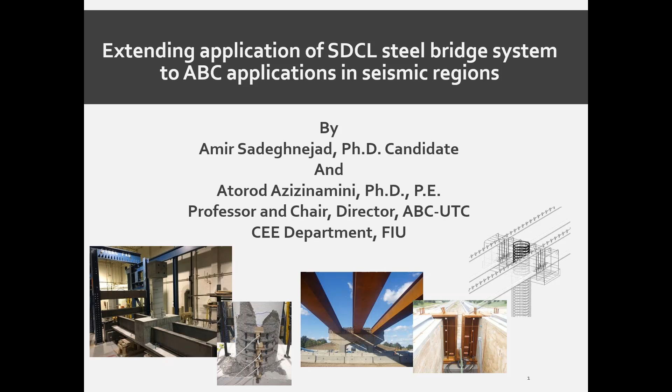For those of you who have not been introduced to the simple for dead load and continuous for live load steel bridge system: typically, the steel bridge system is continuous for dead load and live load. You have a middle piece placed over the pier, and then another end unit that is bolted to the middle piece and supported by a separate crane over the pier. So there are bolted splices, and you usually need two cranes for construction, or temporary towers and things like that.

In this system, you just place the steel girders between the supports, then place some reinforcement over the middle pier, and then cast the deck. When the wet concrete is applied to the system, each girder acts like a simple span - that's where the name simple for dead load comes from. But when the concrete is hardened, the system becomes continuous for live load. So therefore, the name simple for dead load and continuous for live loads.

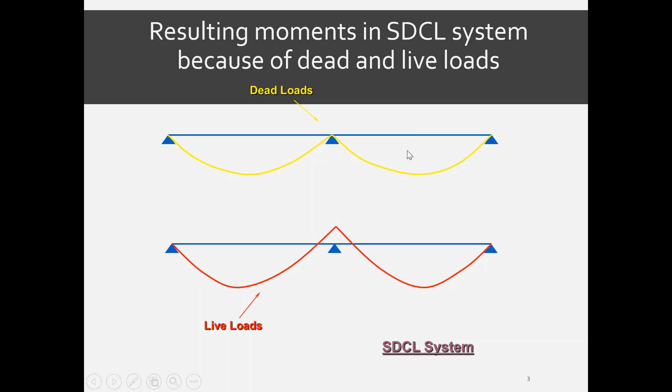Also, when you have a bolted connection, those are an attraction to corrosion problem because you put the girders over the support. You don't need to have two cranes on site, you just need one crane.

It's very stable because I'm going to show you the way to achieve the continuity is by connecting the steel girders over the middle support. During construction, anytime you have the end of your steel girders secured against rotation, you have a very stable system. Nothing bad is going to happen during construction. Those of you who have experience know that if anything bad wants to happen, especially with steel bridges, it happens during construction, usually related to the end support condition. So in that sense, this is a very stable system.

Also, service life. We have many problems with steel girder bridges at the supports because of water and moisture getting in from the top, from the joints, from the expansion joints and so on, causing corrosion at the end of the steel girders. In this case, the end of the steel girders are secured against moisture by being cast inside the concrete, and that helps a lot. So this detail also helps the service life.

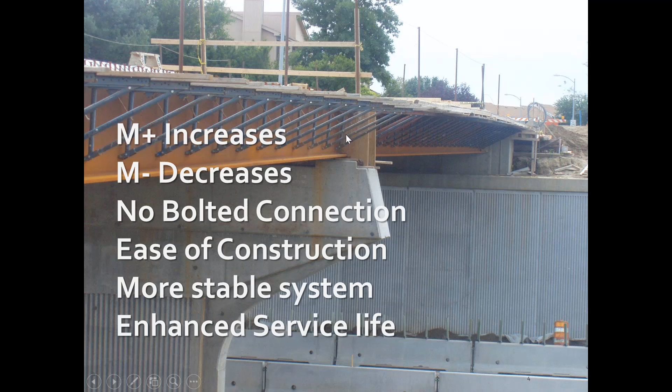There are other details to achieve this SDCL continuity. We do not recommend that. We feel like attaching them using concrete is a better way to go. So over the pier, really what you need...

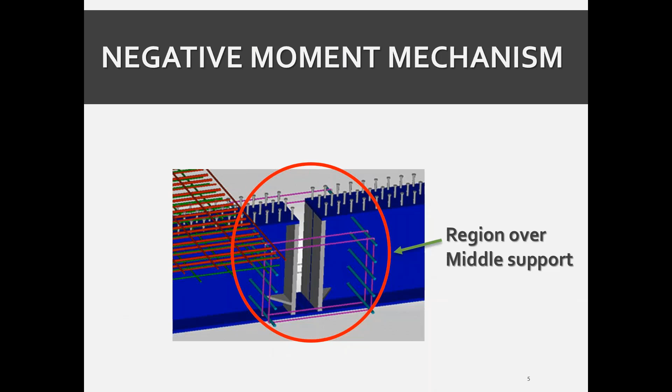...deck. This gives you basically the mechanism to take the tensile force over the pier for negative moment. You also need a mechanism to transfer the compression force. If you use the concrete diaphragm to join the girder, the most important design detailing is to make sure that you have a continuous path to transfer the compression force from one flange to another flange without relying on the concrete. That's very important. Now, you can achieve this using different methods.

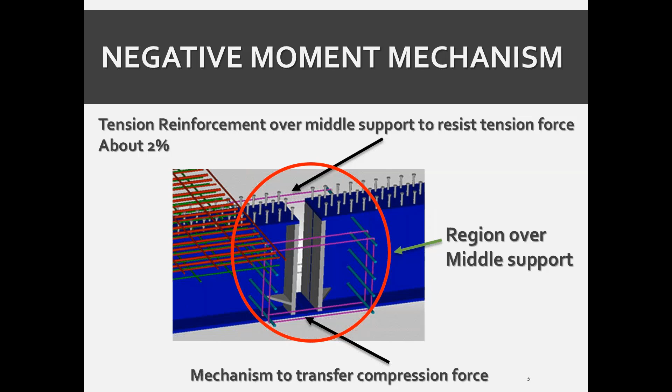I will show you one detail that we have used in practice. The detail I'm going to show you has been researched for more than 7 years. This system, we have researched anywhere from development to monitoring and so on. I will give you some references that you can refer to if you need more detailed information.

Now, one detail that we have used on many projects - by the way, there are many of these bridges in service right now and they have exhibited very nice behavior. One detail is the end of each girder over here, over the pier. There's an end plate, and then there's a steel block. The steel block that we have used is as wide as the width of the flange of the girder. It's about 2 inches thick, and the height is about 4 inches.

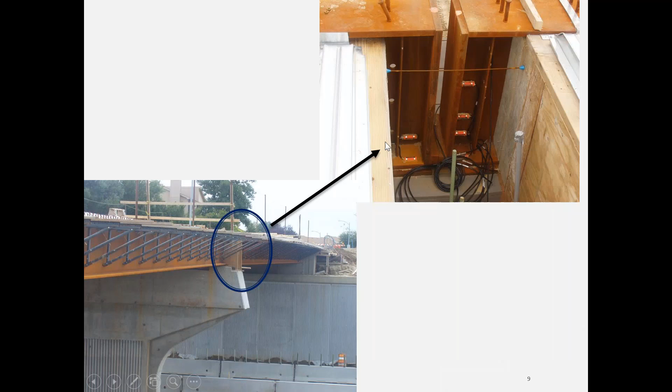So here is the detail, I hope that you can see that. Basically, over the pier, you see the portion of the girder that is embedded in the concrete diaphragm. Each end has a steel plate, end plate, and then the steel block. These steel blocks don't have to be full penetration weld or anything, just tack welded, because you're only transferring the compression.

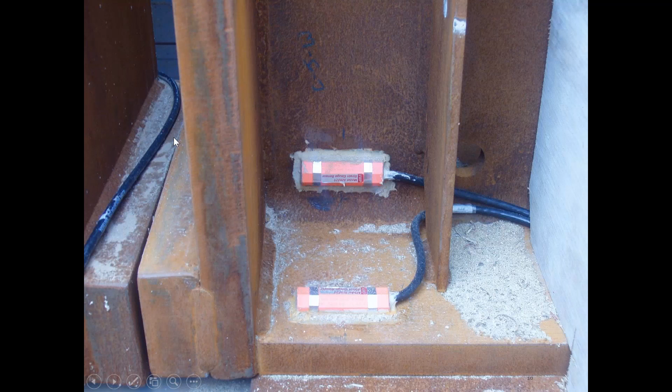This is another shot on a job. Again, in this case you have some contact, but even if you have, let's say, a half inch or so gap between the steel block, you would be just fine. This is another shot of the same bridge - you can see that steel block over here, end plate, and the steel girder. This is the concrete diaphragm.

The sequence of the casting is that you fill this concrete diaphragm maybe halfway, and then you wait for a couple of days until that concrete is hardened. After the concrete is hardened, then you go ahead and cast the deck and the remaining of the concrete diaphragm.

Another thing that's important: we have a detail that allows this whole concrete diaphragm over the pier to rotate. It is hinged using these dowel bars. It behaves like a hinge, so it cannot translate horizontally in either direction, but it can rotate, and you can put some soft material underneath that concrete diaphragm, between the cap beam and the concrete diaphragm.

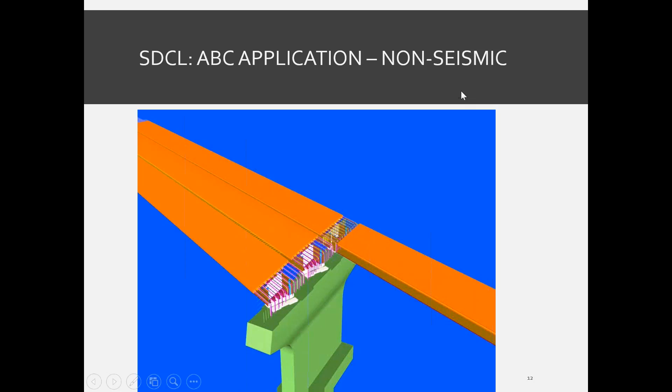Now the ABC application, again, this is non-seismic. In the ABC application, what you have is either a steel box or steel beam. You cast the concrete on top of the box or the steel beam, then you bring this unit, put them side by side, and the longitudinal reinforcement needed for live load continuity, you can develop those by hooking them in the concrete diaphragm.

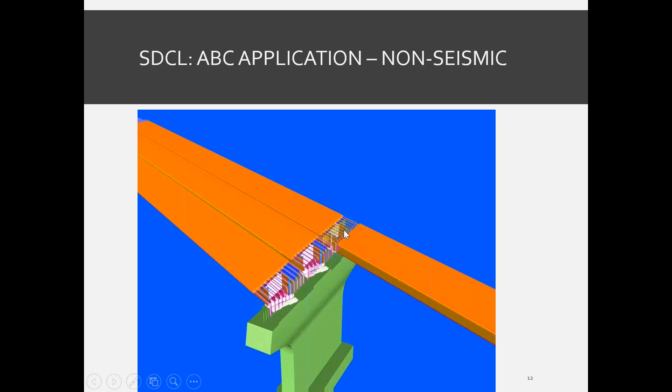One more thing: in a typical bridge, we need about 1% longitudinal reinforcement over the pier for steel bridges. For live load continuity, the amount of longitudinal reinforcement increases to about 2%. The design of that is very simple, it's just like a reinforced concrete beam, and we have a document that tells you how to size the rebars for continuity. But in a sense, it's about 2% of the concrete area.

So in the SDCL as applied in non-seismic areas with the ABC application, it is very user-friendly. First of all, this is an SDCL system that uses the steel box. You form it up basically on the ground.

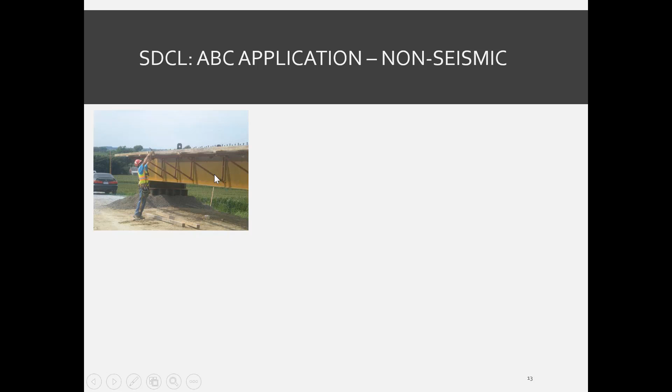Now, in this particular job, the contractor, in fact I was on the job site when they brought the girders. The contractor just put some gravels, put some steel beam, and then the girders were placed over this support that was built in just a matter of less than an hour. And then after that, you form it up, and then you cast each unit.

Basically, you can have a partial depth deck, or you can have a full depth. These are modular units. You can also cast a railing system if you wish. This particular project was 139 feet each span, and the unit, the steel box with the concrete on top, even if you go with the full depth deck, it's going to weigh less than 100 tons, which is very appealing.

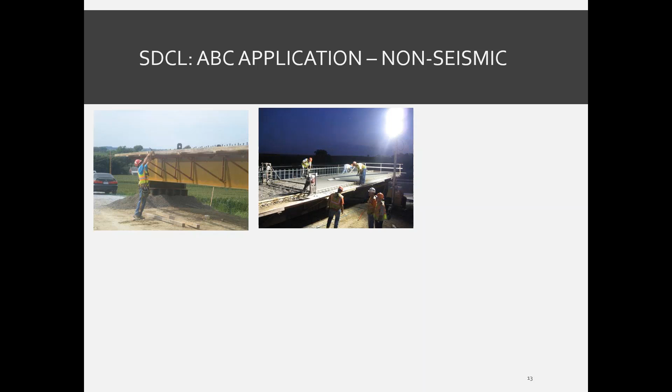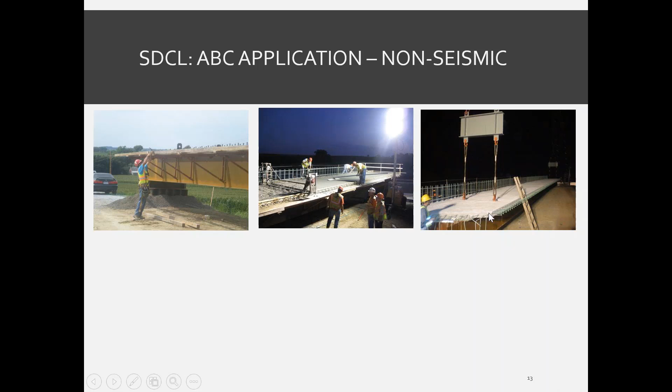And then once the concrete is hardened, you can take each unit and place them over the supports, and you get this condition right here. So this is a two-span continuous. We have 1, 2, 3, and then 3 on the other span. Then you close your longitudinal joints, and then over the pier.

Now, this particular project used the partial depth, and then they came back and put the 2-inch silica fume-based overlay on top of that to finish the project.

Now, one of the advantages that you will have with this system is that because you don't have creep and shrinkage deflections -- and the creep and shrinkage deflection gets more serious as the length of each span increases -- since you don't have the creep and shrinkage deflection, the elevations tend to match. My recommendation would be that for the longitudinal joints, you would be better off just using a full depth deck. But in my opinion, at least, the use of UHPC would be much better an option.

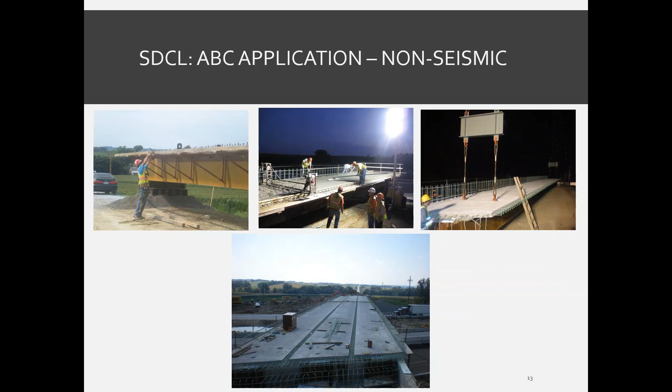This particular bridge was constructed back in 2008, 2009, and there is an archived webinar you can listen to by Mark Traynowicz of the Nebraska Department of Roads.

The detail for this is showing the detail over the pier. As you see here, we can take the longitudinal bars that are about 2% of the concrete area. You can hook them basically and develop them that way over the pier.

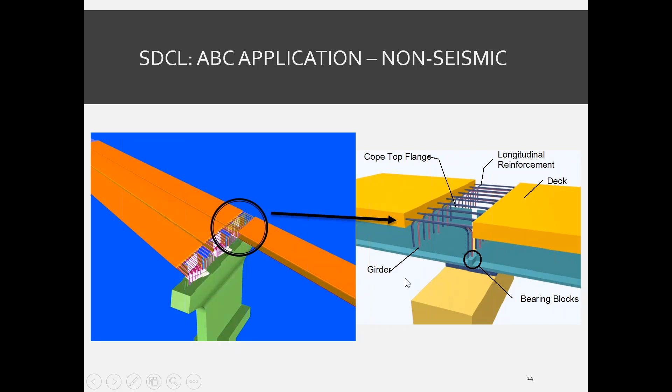This is a shot of the previous slide. Everything is nice in the drawing, but in practice, things are not as beautiful as the drawings. In fact, in this particular job, we had some interference: some of these longitudinal bars that were hooked in the concrete diaphragm were hitting each other, but nevertheless, we were able to manage it. That detail has been tested.

Now, this is what I was saying, that in order to allow the rotation of the system over the pier, you can put some soft material between the concrete diaphragm and the cap beam. There are dowel bars that come from the cap beam into the concrete diaphragm to allow this unit, this detail, to act like a pin. It will prevent translation along the length or in the transverse direction, but will allow the rotation.

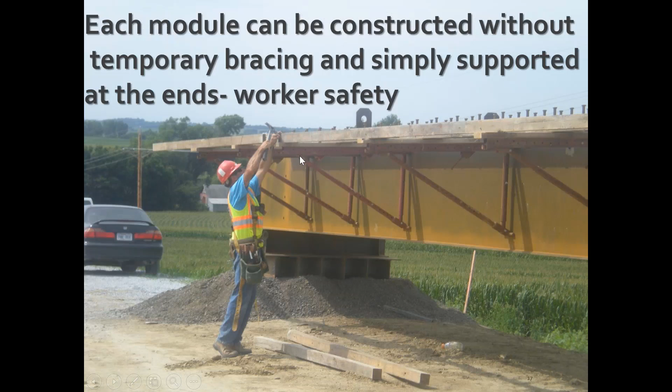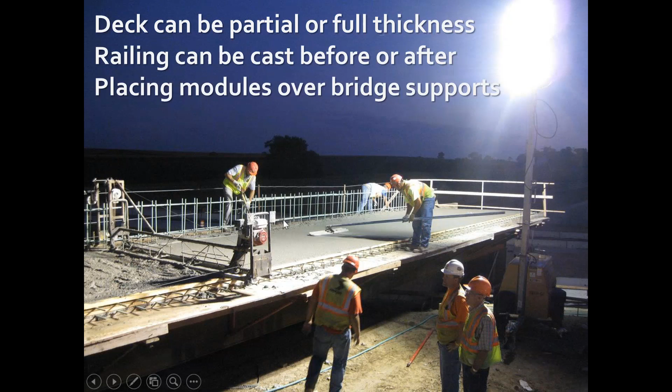Each module, again, can be constructed without temporary bracing. Worker safety is ensured. You can have the partial or full depth deck, and you can have the railing actually cast before you move the unit into place.

For a span of about 135 feet, in fact this was 139 feet. With the deck, you're looking at the whole thing weighing 100 tons, which is very, very nice.

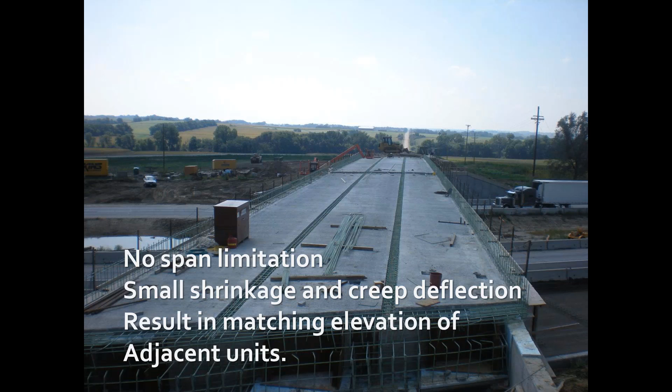Theoretically, there is no span limitation for using this system, except the only thing you have to watch out for is that with this system, your deadload camber tends to be high. For example, for 139 feet, the deadload camber that was specified was about 12 inches. When you're looking at such a large deadload camber, that can create some challenges. So that would be the only consideration.

Okay, now, we started this project because we wanted to extend the application of this SDCL to the high seismic areas.

The detail that we used, as you saw in the previous slides, the steel blocks in the bottom, almost all the time just transfer the compressive force. But in the case of seismic, because of the moment reversal, there's a good possibility that the bottom flange will be subjected to tensile forces. So you need some mechanism to take the tensile forces in the bottom flange. That's why we had to do additional research to extend the system into seismic areas.

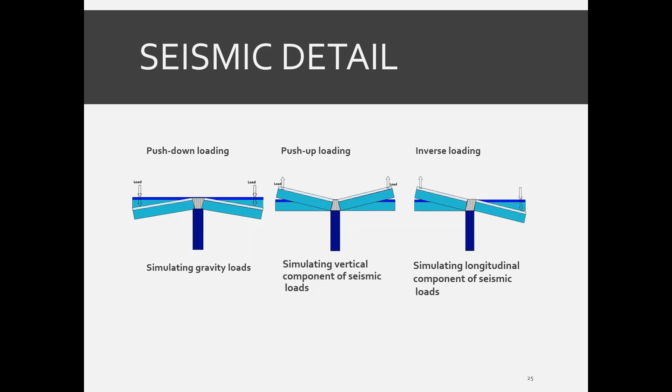And then, of course, this one is for gravity type loading. So again, there's a good dissertation justifying why we used these 3 types of loading in order to understand what forces the joint is going to see during a major seismic event.

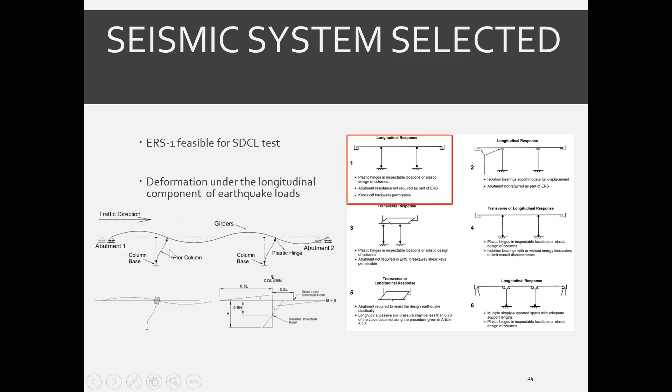Now, the next question is how much reinforcement do you need? We did very extensive numerical, nonlinear finite element analysis, and we concluded that if you provide the reinforcement in the amount specified by Caltrans, you would be fine. That was good for us, because we don't have to do lots of research or experimental and numerical work to figure out how much reinforcement is needed. There's already a specification, and if you follow the Caltrans procedures to design the amount of reinforcement, it will be fine.

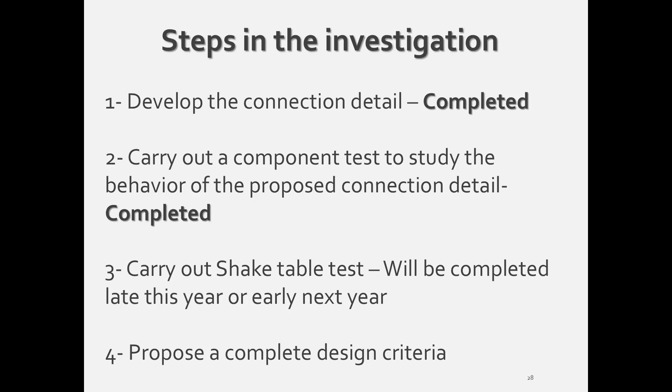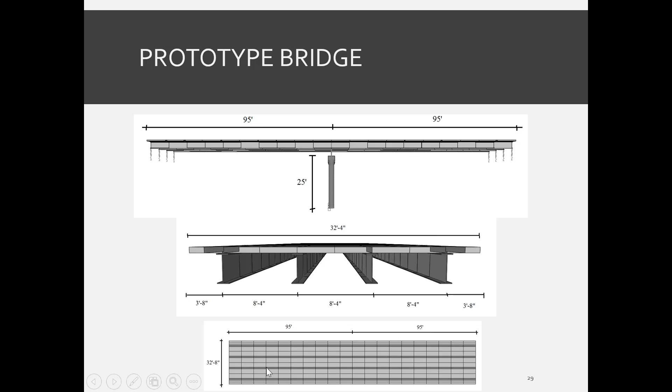For the shake table test and component testing, the prototype bridge was a 2-span, 95-foot, 4-girder bridge with 8-foot 4-inch spacing, 2 lanes of traffic. Our test specimen was the distance between the point of inflection in the deck and the point of inflection in the column. It was easier for us to take this and make it upside down and test it that way. Here's the test specimen, representing a portion of the deck, upside down, and a portion of the column, the distance from the face of the cap beam to the point of inflection at the column.

The test specimen was subjected to a constant axial load representing the dead load, and a cyclic lateral load. The cap beam was designed based on Caltrans provisions, and the purpose of the component testing was to verify that when we subject this specimen to the constant axial load, at about 10% of the pure axial load capacity of the column, and the cyclic lateral load, the plastic hinge forms at the end point, and the cap beam stays completely elastic.

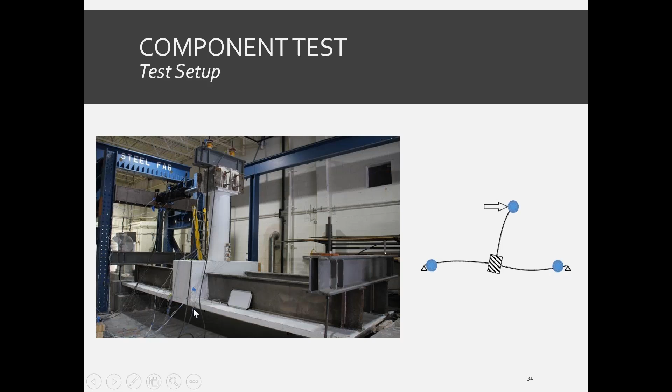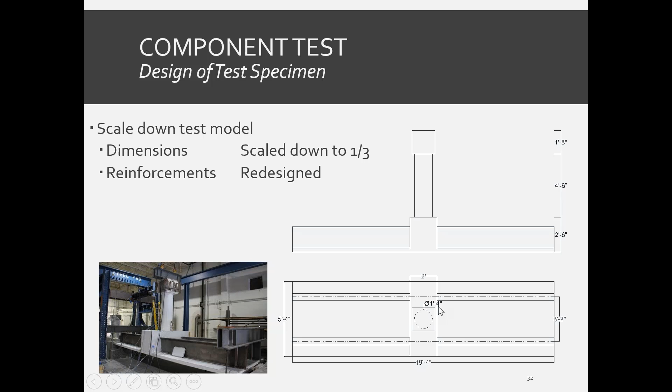Our test specimen is about 19 feet. The distance between end support to end support is 19 feet. The height of the column is about 4.5 feet, and about 1 foot more. The diameter of the column is 1 foot 4 inches, so 16 inches. At this point, I'm going to turn it over to Amir, who will briefly tell us the results of the component test that he completed.

Thank you, Dr. Azizinamini.

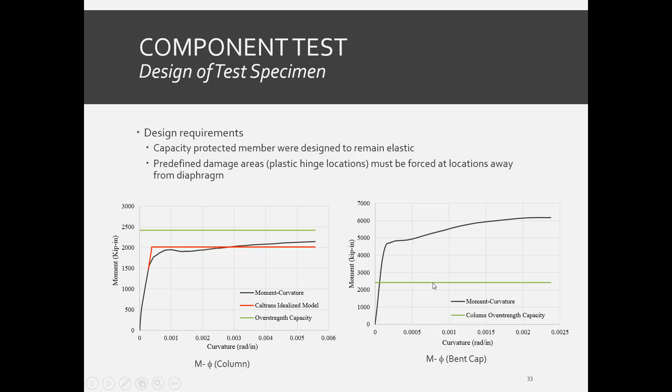After designing the connection and bent cap based on the required capacity, Caltrans provisions were used for different components of the bent cap and the connection.

As Dr. Azizinamini already discussed, we have the details for the seismic SDCL connection, which consists of vertical reinforcement that carries the moment reversal loads, side reinforcement that goes through the web of the girders, tie bars between the compression flanges to carry possible tension forces, bearing blocks, and additional deck reinforcement to carry the negative moment for continuity of the connection.

Caltrans provides the design criteria for these horizontal and vertical bars, and the remaining details were designed based on the first phase of the project.

Here you can see the perspective view of the test setup. An axial load is applied on the column to replicate the actual structural behavior. The axial load applied is almost 10% of the axial load capacity of the column. The lateral load replicates the longitudinal component of the seismic loads.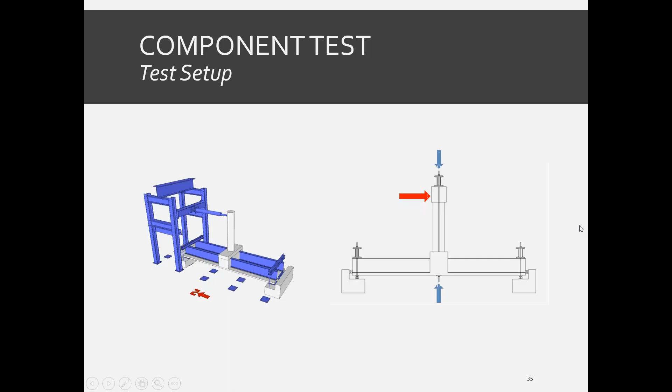We carried out the test at FIU Structures Lab. Because of our inverted test design, the sequence of construction is somewhat opposite of how a typical bridge is constructed. We started with the deck, after which the cap beam was cast, and lastly, the column was made.

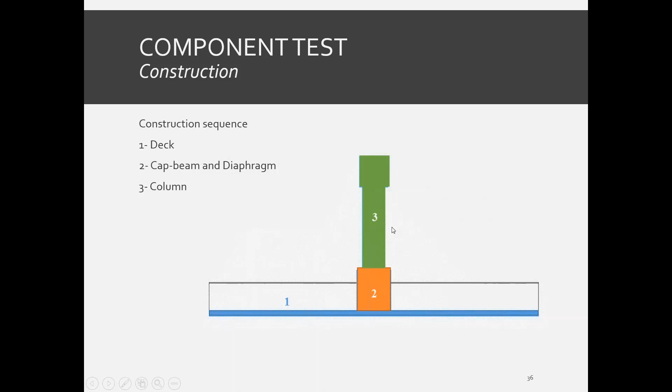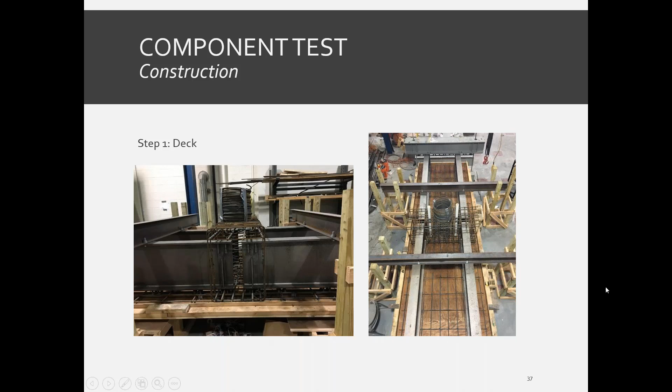Here are some photographs of the specimen before the casting of concrete. The specimen was sufficiently supported at the bottom to prevent any undue deflection. We used these auxiliary beams in the transverse direction to prevent movement of the girders during concrete casting, and removed them later on. These auxiliary beams were used only because of the inverted test setup; this is not needed on the site.

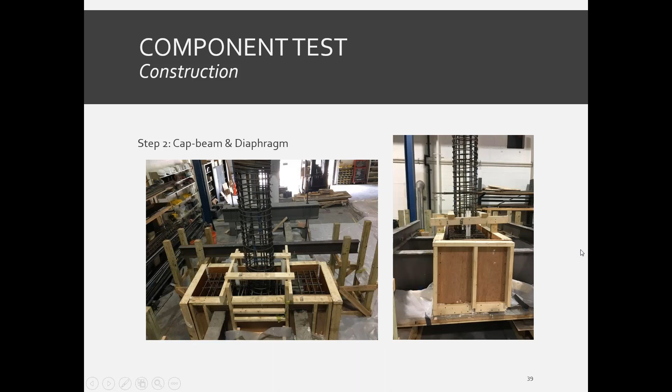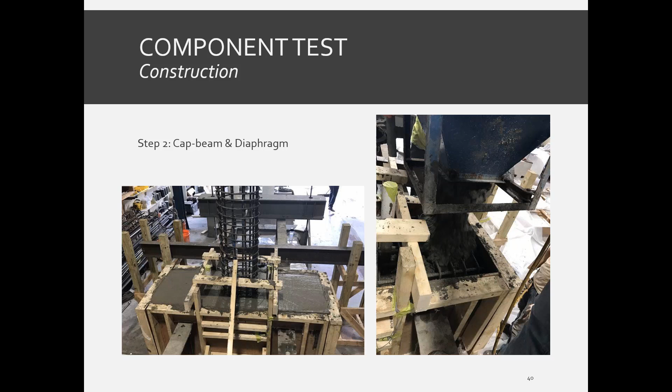This photo shows the casting procedure of the cap beam, which was cast 3 weeks after the first step. We have some additional photos for casting of the cap beam, and at the end, the column was cast.

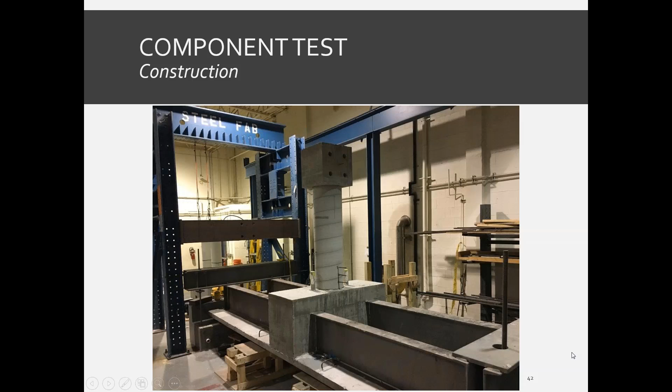The next step was preparation of the test setup. The lateral and axial load mechanisms were put in place. You can see here the actuators used for lateral cyclic loads, and we had the hydraulic rams to apply axial loads.

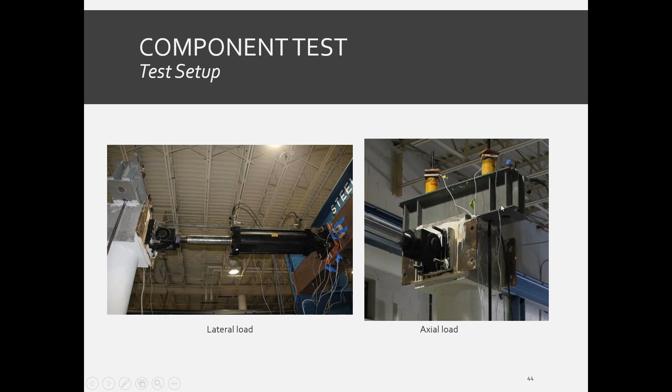We observed that the crack initiated in the plastic hinge region, followed by cover crushing during the first 3 cycles, and the cover spalling extended to larger areas as the displacement level increased.

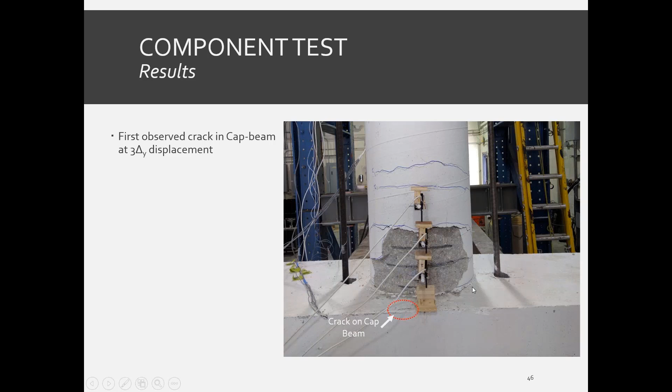The crack which I showed you in the last slide started to propagate at later stages of the test. Although this was superficial damage, we believe that better construction practices at larger scale will prevent such damage.

Caltrans provision suggests the bent cap width be at least 2 feet wider than the column diameter, meaning 12 inches on each side of the column to the cap beam edge. Since this parameter was scaled down to 4 inches on each side, it is believed that this might be the reason for the damage on the cap beam.

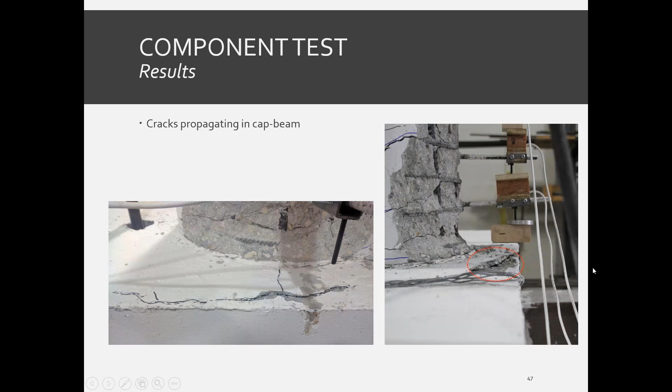The mode of failure for the experiment was fracture and buckling of rebars. At this stage, we observed that the core concrete of the column had crushed extensively.

From the hysteretic curve, we found that almost 20% strength degradation had occurred, and at the end of the first cycle of the 7 delta Y displacement level, the testing was halted.

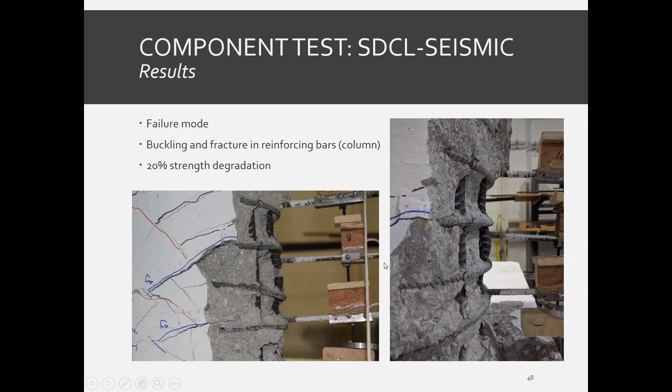Based on the experimental results, we can conclude that the failure occurred at the first cycle of 7 delta Y by fracturing one of the column longitudinal rebars, causing a 20% decrease in the capacity of the column. At this point, the test was terminated. Based on this, the ductility level of the column is concluded to be around 6.

The specimen was instrumented with strain gauges on column longitudinal rebars. Results show that the strains in the reinforcement inside the cap beam did not increase substantially. However, the strain gauges on rebars close to the cap beam and column interface showed significant strain on these bars. The strains in the plastic hinge region showed an increase, as expected.

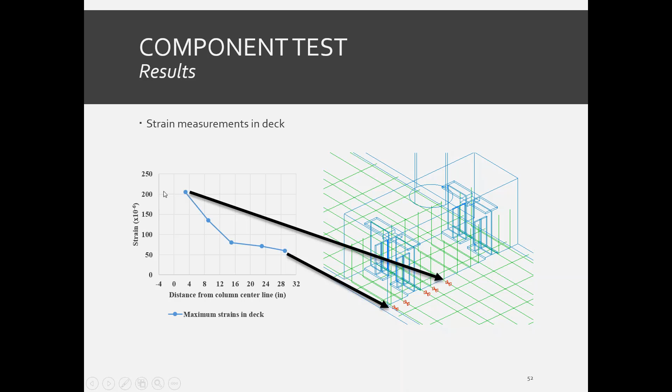And in this figure, the measured strain in deck longitudinal rebars correspond to the strain gauge locations. The strain gauges are located just outside the diaphragm. Due to the symmetrical condition of the slabs, only half of the rebars were instrumented, and the graph shows that the deck remained elastic during the whole experiment.

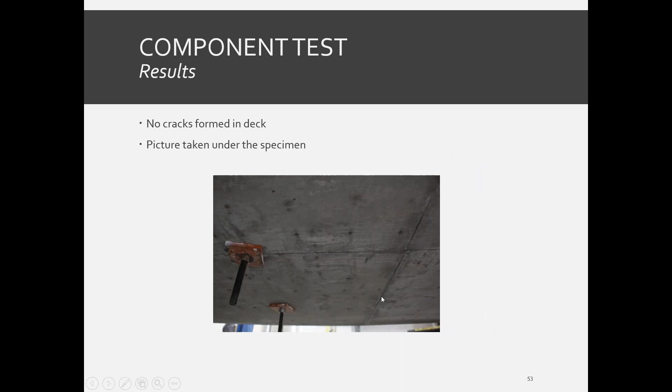You can also see in this picture, taken from the bottom of the deck, that the deck remained intact without any appearance of visible cracking.

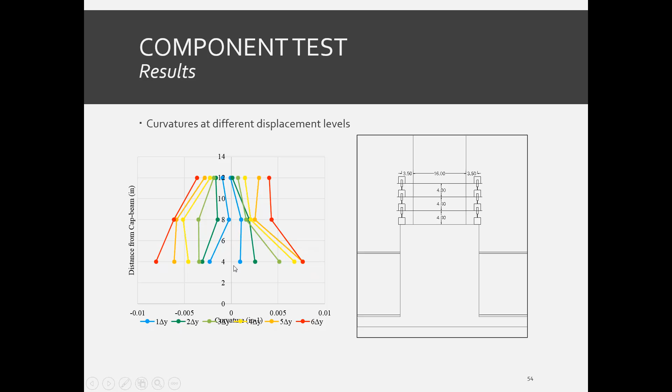Now I would like to pass the presentation back to Dr. Azizinamini for concluding remarks. Thank you.

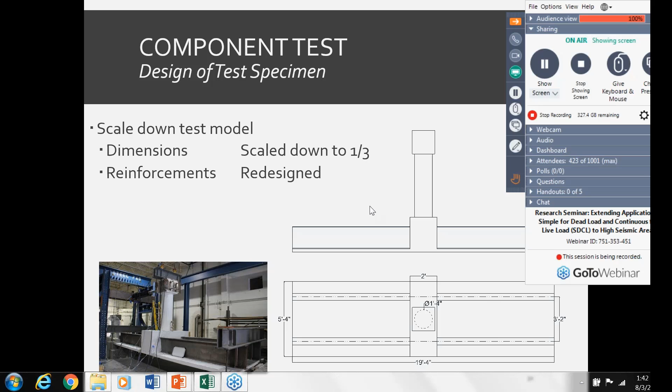So what I would like to do right now is provide you with some of the preliminary conclusions that we have based on the extensive numerical work and the component test. And as I said, the next step is going to be to learn from all the work that has been completed and then make appropriate changes if needed, and then do the shake table test at the University of Nevada, Reno.

One conclusion is that, as the experimental test indicated, the connection detail that we have come up with for extending the SDCL to high seismic areas is working, in the sense that it made sure that the capacity-protected portion of the structure remains elastic.

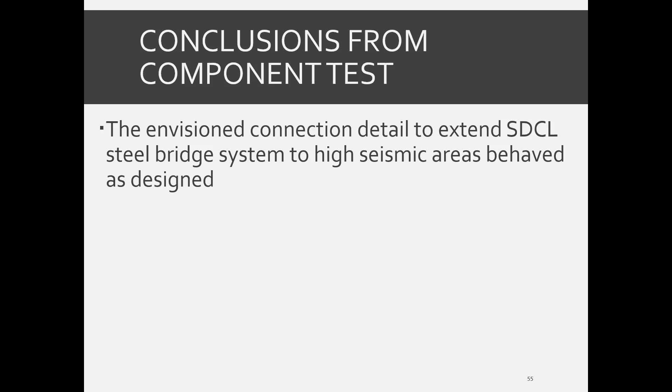As Amir mentioned, the maximum strain in the vertical bar in the cap beam was just 800 microstrain. In the deck, we had about 200 microstrain, way below yield, while the plastic hinge was forming at the end of the column. So in that sense, the connection did its job, keeping the cap beam pretty much elastic, and the plastic hinge, of course, formed at the end of the column as we expected.

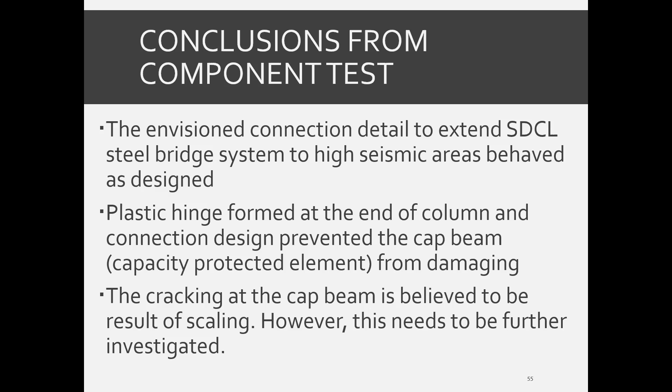Now, the cracking at the cap beam that you saw should not happen, but we believe that's the result of basically scaling. We have another detail that, if somebody is really concerned about that, can completely eliminate it. I have some slides that, if there's time, I can show you how to do that.

Right now, we are continuing to do our nonlinear finite element analysis to learn more about this system. These finite element analyses are calibrated with the test. So there are some parameters that we have not studied experimentally; we can do it numerically, such as the skew effect, things like that. That's going to be continuing.

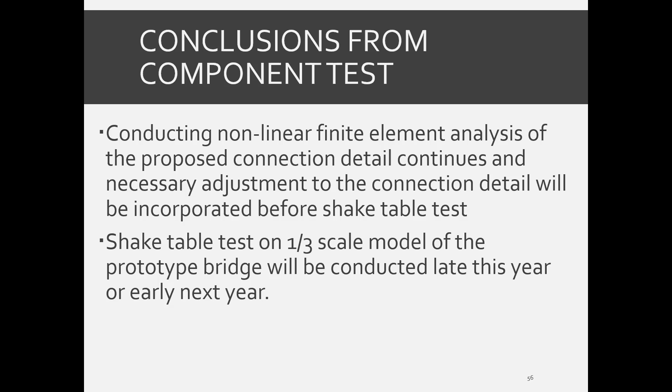And the shake table test right now is scheduled for November of this year, and we are hoping about a year, probably a little bit longer than a year, to have the complete design recommendation. So with that, I'd like to conclude this presentation, and we'll be happy to answer any questions there might be.

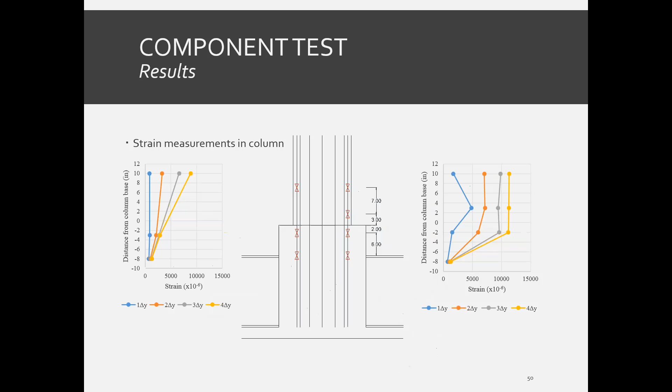I believe you can go to slide 20—there was a sequence that Amir had shown around 26, 27. Right, the test specimen that we had—let me show you here. Now we are interested in this point right here. This component test was to verify that with this kind of detailing, you're going to have a plastic hinge that forms at the end of the column. The cap beam was designed based basically on the Caltrans requirement.

So you're going to have some axial load. There were rods over here that we applied the axial load with, kept it constant, and then after that we basically applied the cyclic lateral load. Now, this is not as good as if you tested the whole system, but nevertheless we think it's a very good test setup to understand the behavior of this region right here, and as you saw, everything else stays completely elastic. So I think this setup with the axial load and lateral load gave us sufficient information.

Now, the shake table test is going to be done the right way up, so we will learn more if there is anything else that might happen in the system from the shake table.

There was a follow-up question: did you also consider the moment due to the weight of the column, loading cap, and part of the actuator because of the inverted test setup? I believe you just answered it—when you go back to the second test, you're going to do everything right side up, correct?

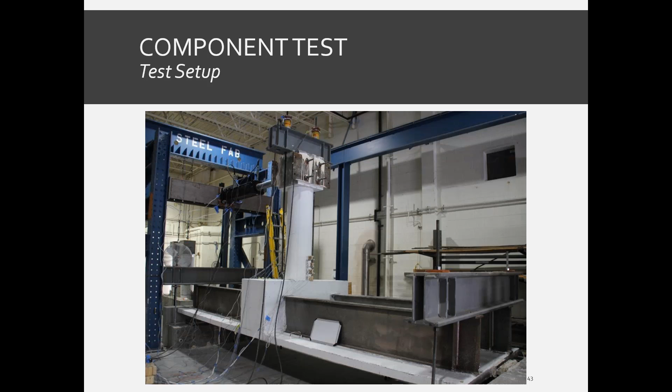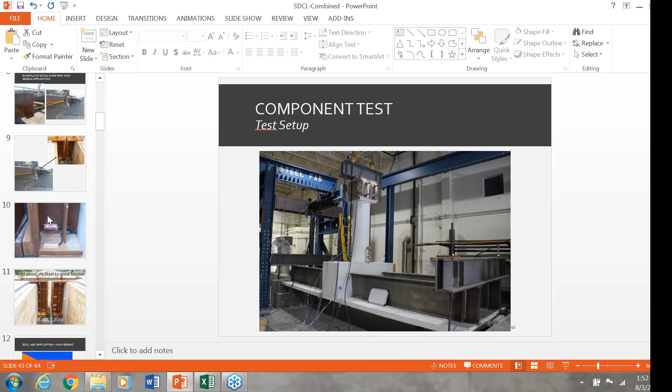So what was the thought of coming up with the bearing plate detail and the end plate detail? Yeah, let me show you. I believe the question is related to this particular detail right there. Right, yep, this detail, yes.

This particular detail is as simple as you can go. There are other ways to continue - you can weld a plate to a sole plate, weld it to this flange and the flange of the other girder, or you can connect the bottom flanges by bolting a plate. When you do the welding, you get into fatigue categories, and when you're bolting, there are problems in the field. So this one is a very cheap detail, and you don't have to have full contact.

The most important thing is to cast the whole thing in concrete. There are other details that do not use concrete to attach the two girders together. In our opinion, that's not good because you've got too many details that are prone to corrosion. But if you want to cast in concrete, this is as simple as you can get.

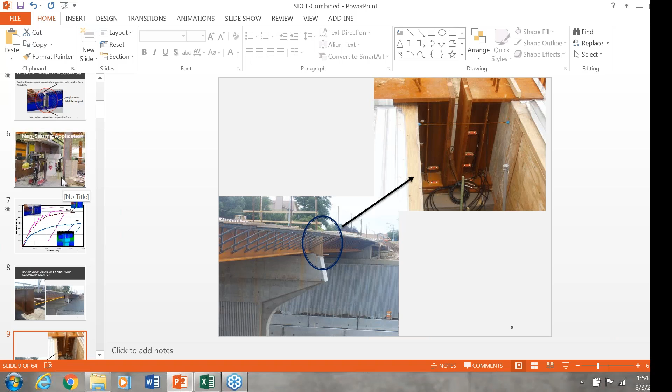Atorod, we kind of heard perhaps two different things as you were presenting, just to get some clarity here. Around this slide, I believe you had mentioned there were two closure pours to close up the pier cap - a first and then a second, and I guess the second also included the closure pour of the deck itself. It looks like in the testing there was a single closure pour used to make the cap, and I guess the question is leading to, there's cold joints occurring here. There was also a third mention of using perhaps a flexible material between the pier cap and the closure pour of the pier cap to get additional rotation. Can you clarify between these three different scenarios, what the intent is here?

Sure, okay. First of all, the soft material - there is a concern that when you attach everything with a concrete diaphragm, this whole thing over the pier should be able to rotate and act as a hinge. So what you do is put some soft material. In fact, in a couple of bridges that have been built, that's what they've done - like a styrofoam or something they put here, and then they cast the concrete on top of that, and then there's a dowel bar that goes here. That's how you achieve the rotation.

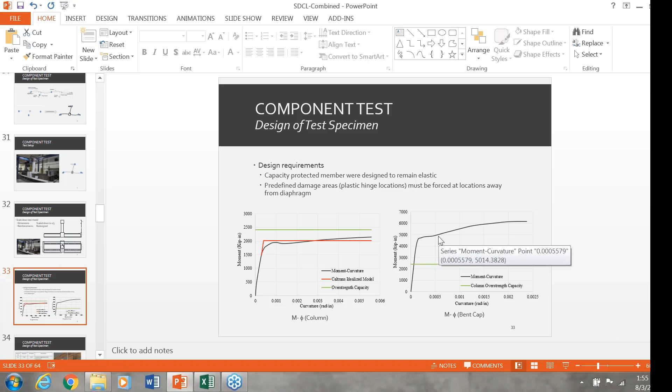The other question is about the test specimen, and correctly it was pointed out that in our test specimen we didn't have that cold joint in there. We don't believe that is going to be too important because the moment capacity of this joint that you see over here is so much higher than the column that it should not be an issue. But in the shake table test, there's going to be a cold joint, so we'll see if there's anything. I don't believe it's going to be a factor because if you look at the overstrength factor - you take the capacity of the column multiplied by the overstrength factor, and the capacity of the cap beam is much higher than that. So the cold joint hopefully should not be an issue.

But it is correct that for the test specimen, we didn't do a stage casting - we casted this whole thing in one shot.

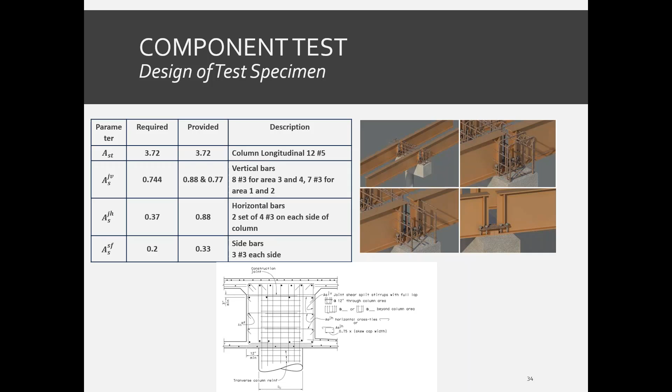Okay Atorod, can you go down to slide 34 for the next question? I want to see if we can get a visual here. I believe this is the correct one that will help. It's kind of specific to the lower right-hand corner rendering that you have there. There was a question related to the uplift - are those, we'll call them horizontal bars, necessary when you have the vertical dowels and all that going on, to hold the beams and the concrete closure pour in an uplift situation?

Yes, yes you do, and let me show you here. All the numerical work that we did showed that if you have a moment reversal, these bars are not effective to carry that type of loading - this type of loading produces tension on this side, it pushes here, and these ties are not effective, so you need only this. On the other hand, when you have this type of loading, like a vertical acceleration, the dowel bar is not effective, and only these bars will become effective. So under different types of loading, different parts of the detail get activated. So yes, you do need this one.

You do need this for the vertical acceleration. You need the vertical bars for the moment reversal. And if we didn't have this, this vertical stirrup would not be able to take the vertical acceleration.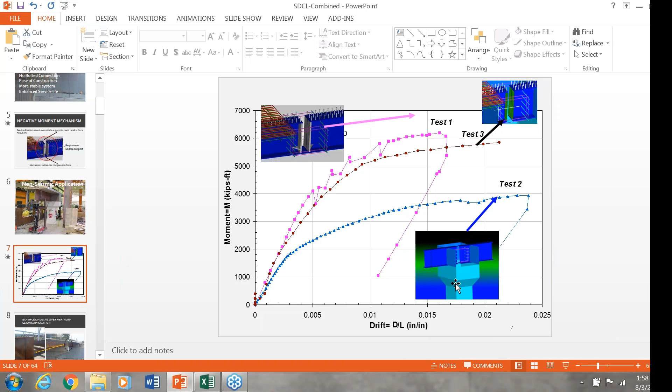On the lower right-hand detail, where we didn't have the bearing plates, you had indicated that there was concrete crushing and it reduced the capacity by 50%. Then further on, with the bearing plate detail, you indicated that a gap was acceptable, maybe up to 1 inch between the end bearing plates. It seemed kind of counterintuitive. If the idea was to prevent concrete crushing and you're allowing a 1 inch gap between the bearing plates, would that crushing still occur, or should there actually be some kind of contact area between the two bearing plates?

Good question. First of all, if you don't have any treatment at the end of the beam, what happens? You have a very small area of a steel girder that is transferring a large compressive force, coupled with the fact that the modulus of elasticity of the steel is 8-9 times more than the concrete, that's why it's going to crush the concrete, and it's not going to allow the development of the yield capacity of the tension reinforcement. So your moment capacity is going to decrease.

Now, when you put the end plate, that end plate also helps to distribute the load too. So another way, you don't have all the compressive force being transferred only through the bottom flange, but this end plate also helps. So it's an intermediate solution between this case and full continuity between bottom flange.

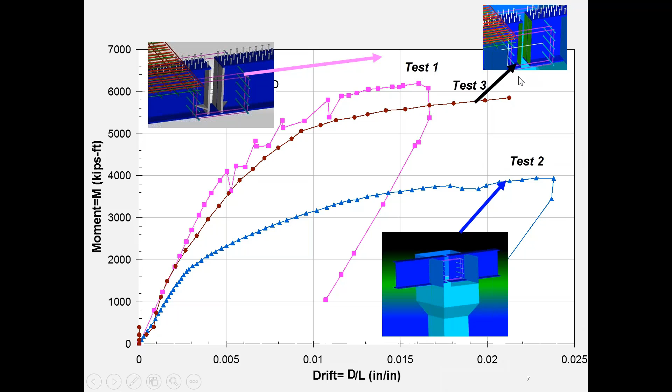Now, as far as this gap goes, there have been many of these bridges in service, many that have been constructed. Our recommendation is that as long as you have maybe about 1 inch or so gap, you don't have to have full contact. It's a good idea to have a contact here, okay?

Like you see here, it's good to have a contact, but even if there was a gap, I wouldn't worry about it because the paste is going to go and fill it up, and it's going to be predominantly compression. Remember also there's going to be concrete surrounding that, so that concrete is going to be confined, and so you won't have as much problem. That's why an inch or so is fine. You're not going to get into a problem.

We don't recommend just having an end plate with a complete gap because that will create a problem, since the axial stiffness of the system at this point is much higher than here. So you can't get by just with an end plate. You have to have these steel blocks, but if you have about a 1 inch gap, you should be fine.

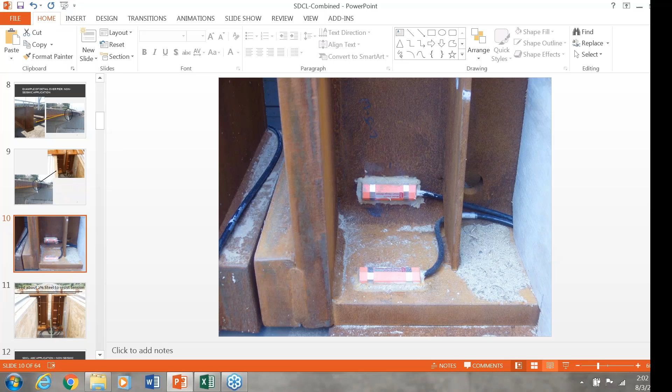Great. Okay, where are we at? All right, slide 10. There was a question regarding slide 10. Let's get a visual on that. And then we have to jump to slide 26. Let's see what that slide looks like. There was a question basically asking, are the two details in conflict with one another? It seemed like the connection for the seismic detail on slide 26 is in conflict with the details shown on slide 10. What are we looking at?

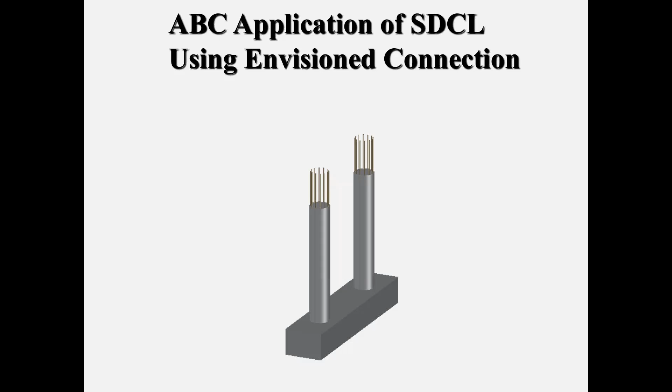Okay, this is a seismic application with ABC. So what you do, you put your precast column, you put this partial cap beam precast, and then you put this detail, but then you have to use the steel reinforcement detail that should go here, the same as this right here. So the bars are spread out.

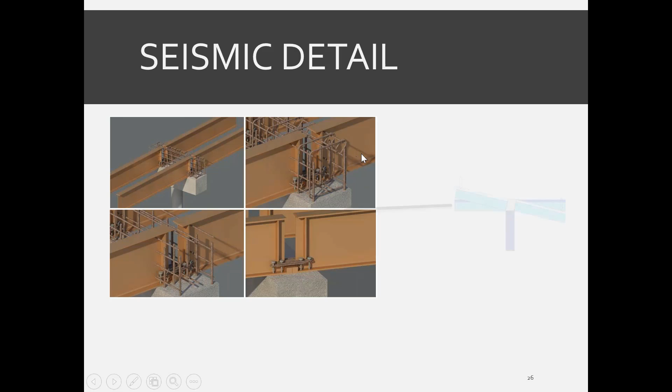Yeah, exactly. So you're going to have this, okay? And then, let me go back over here. So this way, and then at this point, you're going to have the detail that you're recommending, and then you pour the concrete.

So they're not in conflict. No, okay, great. It is mentioned that using Caltrans connection detail for concrete diaphragm, is the detail changing based on the seismic design parameters, or do you recommend using the connection detail for the worst case for all applications?

If the question is non-seismic, no, we don't recommend this one for non-seismic at all. That is too much. But for the seismic, our recommendation right now is that what's in the Caltrans is good enough, which is based on the test that was done at Iowa State, I believe.

Okay, and a question that sort of complements that is the connection. How would you expect it to behave in regions with very important vertical acceleration components higher than 0.6 G?

That's the purpose of having this right here. In fact, the Caltrans requirement is that to assume 25% of the weight for the vertical. Usually, vertical acceleration is not taken into account. It's not considered regularly. Even in shake table tests, that's one of the limitations. The vertical acceleration is not simulated, which I think is a bit of a handicap. But if you put these ties, that's why we have these ties right here.

Now, we don't have a good design criteria for this right now. I think that's something we need to work on and establish some criteria based on the numerical method. That's one of the reasons we are doing the parametric study with the nonlinear finite element analysis, to study some of the parameters that we were not able to do experimentally. So we don't have it right now.

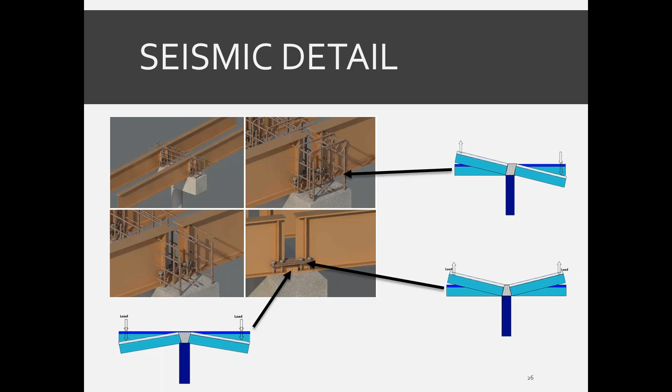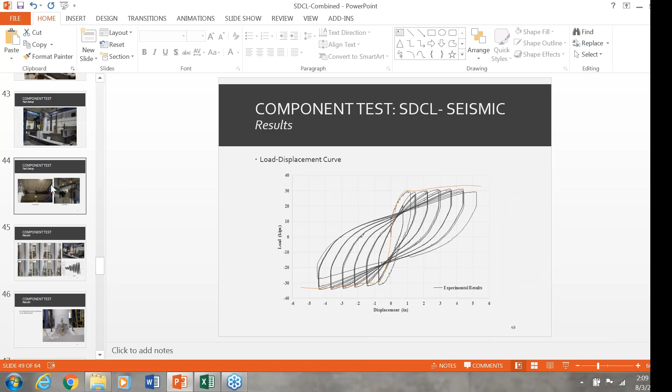The other thing with respect to displacement, let me elaborate. This is not reflected in the code, but I think in seismic design we need to take that into account. The levels in the test, for example, in a major seismic event, you're not going to go to the level of needing this level of displacement ductility ratios.

The other thing to keep in mind is that the type of loading we apply during the test, which is 3 cycles at each displacement ductility ratio, does not really represent any specific earthquake. So the most common question is: you're telling me to use this system in a seismic event, but you're testing it using a loading that doesn't represent any earthquake. So how do you justify it?

Well, the only answer to that question—and we do this practice in buildings and bridges—is this: when we test it, we are subjecting the test specimens to a type of loading that does not simulate any particular earthquake.

Experience shows that if you subject the test specimen to this type of loading and it survives a displacement ductility of 4, 5, or 6, then that detail is going to survive major earthquakes. So it envelopes the actual earthquake scenario types.

It's not so much enveloping, put it another way—this is like a severe test. I want to say, if it survived this type of loading, then that detail has the capability of surviving a major earthquake.

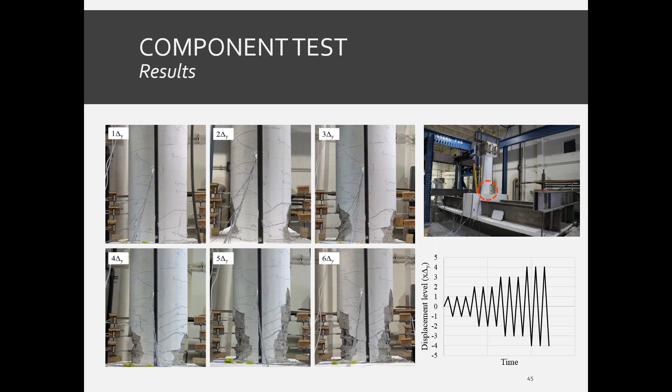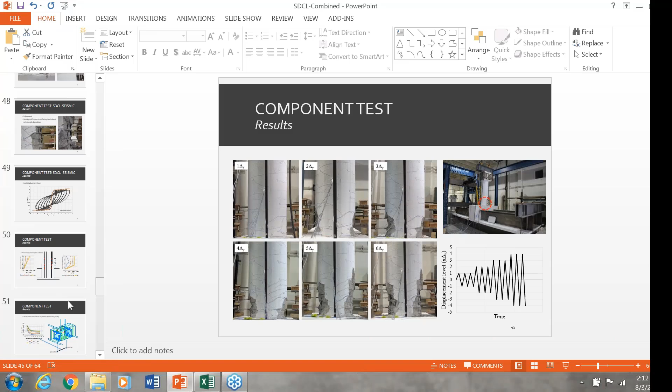Is there any reason for using the overstrength capacity and the M-phi of the bent cap shown in one of the slides, rather than the overstrength capacity of the superstructure? This is being asked because designers are interested in the joint behavior and the superstructure performance for the longitudinal direction. Does that make sense?